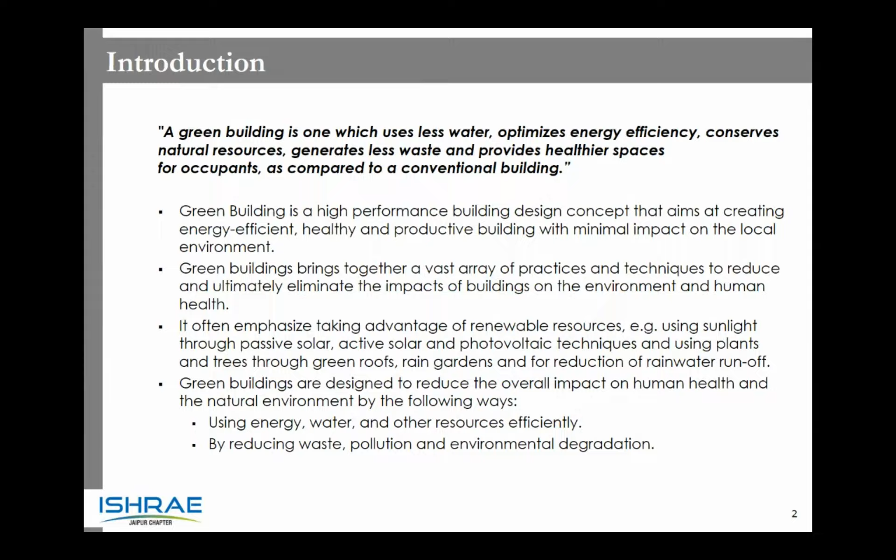Initially, when I entered this industry, the green building industry, back in 2008, the perception of a green building was that a lot of people confused whether it should be colored green, because the color can pose a natural look. I'm talking about a layman understanding. A decade ago, people thought a green building would have a lot of trees and plantation. That is entirely untrue.

The definition is a lot more than that. Green buildings back then were also believed to be more expensive and unaffordable. A lot of people used to think it is only for the luxury segment. Right now, we have so many forms of green buildings - it is very affordable and oftentimes costs less than a conventional building.

So green buildings, in definition itself, have evolved - whether it is the engineering design understanding, the architectural understanding, or the understanding of a layman. In the past, the actual intention...

The green buildings have trees all over and can be green in color - the past actual intention used to be use of less, efficient plantation that does not consume more water, collecting rainwater and making sure we utilize it, dual plumbing, things like insulation on the ceiling, insulation on the wall.

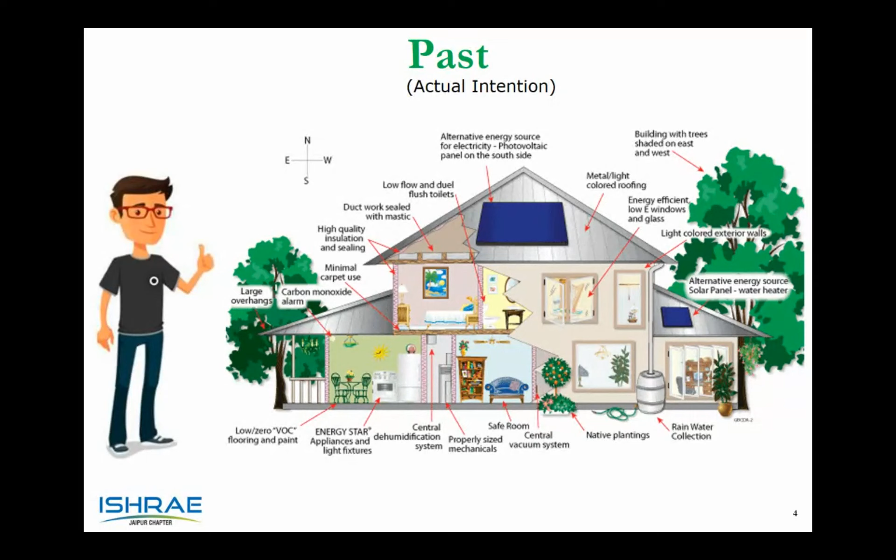And I would not disagree that this continues to be one aspect of green building design even today. However, how have we evolved, especially in today's time when we are battling the COVID-19 situation and most of us are locked inside either our homes or our offices, not having much interaction with the outdoor world?

Buildings have started proving to be a very important aspect of our life. Buildings have also grown in numbers in India, and the trend is very visible - the number of buildings that existed in 2020 are going to increase by at least thrice by the year 2030. And apart from it, since the community discusses a lot about the effects of air conditioning and sustainability relevant to the heating, refrigeration, and air conditioning world, 40% of these buildings at times, especially commercial buildings, consume electricity because of air conditioning.

The government is also coming up with a lot of cold storage plants and food storage and warehousing plans. The warehousing numbers are going up, and so the role of buildings in our day-to-day lives is going up day by day - the role that buildings have played, whether it is visual comfort, acoustic comfort, comfort in general, day-to-day well-being.

Infection transmission - each building has its own parameters through which it will continue to impact you in ways it has never impacted before, because in the past we have never spent so much time inside a building. Till date, the rough statistics show about...

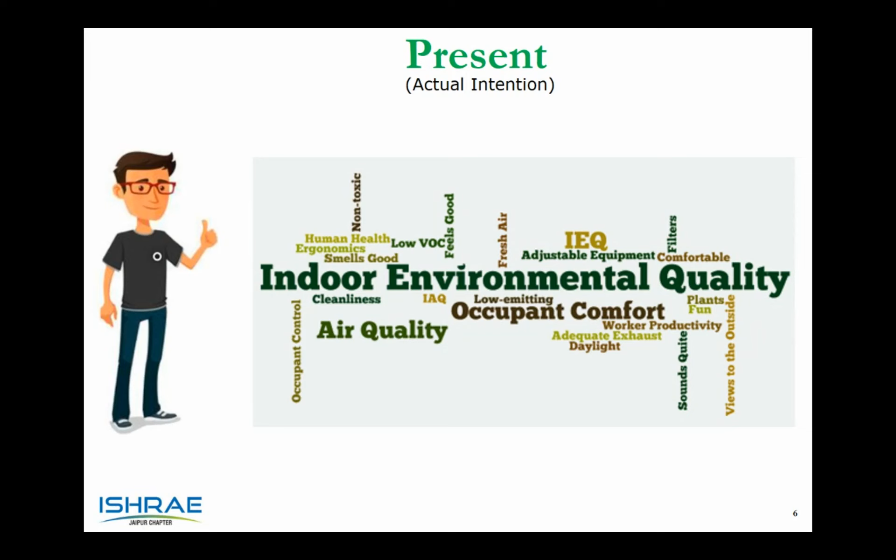We had nearly two rating systems in India. There was LEED version 2, which had partnered with IGBC in India and come to India. That was one rating system, and the other was GRIHA, which was developed indigenously by TERI. So there were two rating systems in India back then, and that is where the green building movement began.

Also, ECBC 2007 was launched, and it was far from being implemented. ECBC, just to let you know, caters to commercial buildings, and the 2007 version for commercial buildings has been made mandatory by a lot of states by now. We already have the ECBC 2017 version, which is in the process of notification in several states, including Rajasthan. In fact, Rajasthan was the first state to notify the ECBC 2007 version in the entire country.

The version 2 of LEED evolved, going to version 4. Back then, there used to be generalistic rating systems - LEED and IGBC used to call it the new building rating system and existing building rating system. Now LEED calls it building design and construction. It has a separate rating for cities, and a separate rating system for homes, which was earlier only for the US.

LEED has a process called ARC, where you can dynamically put data and assess the performance of your building. The existing buildings rating has been changed to operations and maintenance, and LEED went from version 2 to version 3, and now version 4. So the rating system has also evolved a lot, catering to all these needs that I spoke about.

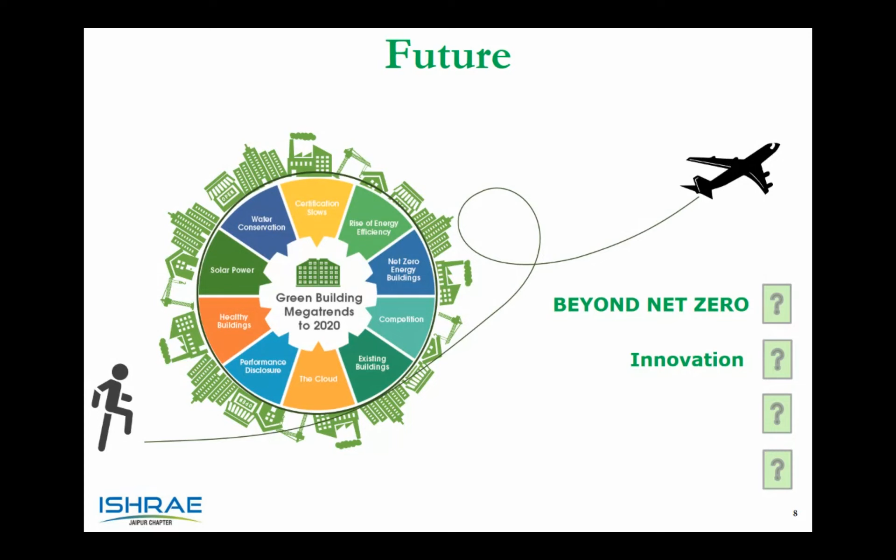Taking over green building, we always say it should have proper orientation so that we have daylight. Until now, daylight has only been focused on regularly occupied spaces that are usually occupied throughout the day. But now people are coming up with concepts where non-regularly occupied spaces should also have daylight. Pilot credits have been introduced in several rating systems regarding this, and we might see entirely daylit buildings also in the future.

There are several other concepts such as glazed north facades - passive measures which do not cost us anything, but in India, especially when we have a life cycle of over 100 years for buildings, 50 to 100 years, these small changes can have very large cumulative impacts on the global and local environments.

Rainwater harvesting is starting to become popular, especially after awareness that has been created by the government. A lot of people are now willing to do rainwater harvesting, even in small size plots. Large size plots, it's already mandatory and getting implemented.

STPs are becoming popular. There was a lot of problems a decade ago about implementation of STPs - smell issues and so on - which are getting better with technology interventions as the day passes.

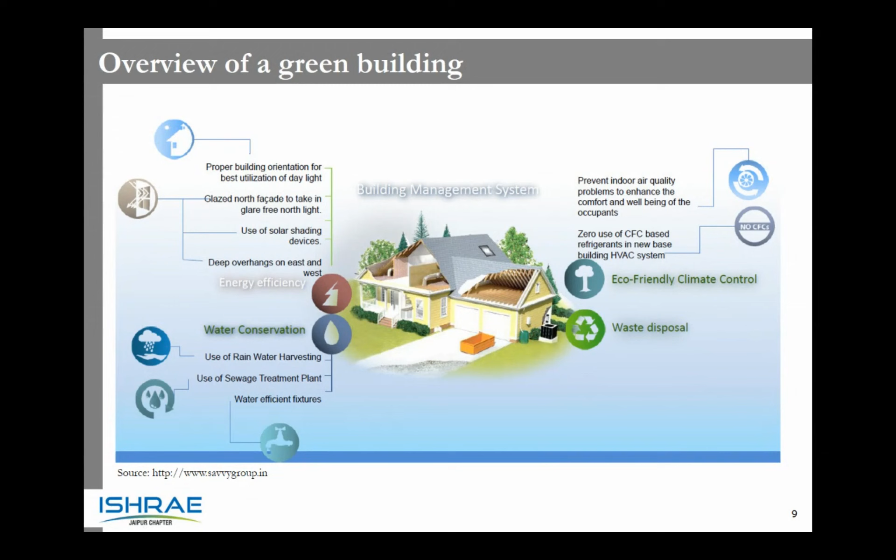Life cycle green building includes the reuse, recycle, and reduce. And one new R has been added of late, which has become very popular during the COVID times, which is called refuse.

Saying no to consumption, or trying to consume less, is also a very sustainable measure. Sourcing local construction material, efficient use of water, water efficient landscaping, savings during consumption, environmental control, water management, and disposal strategies like solid waste control and grey water handling are all part of building.

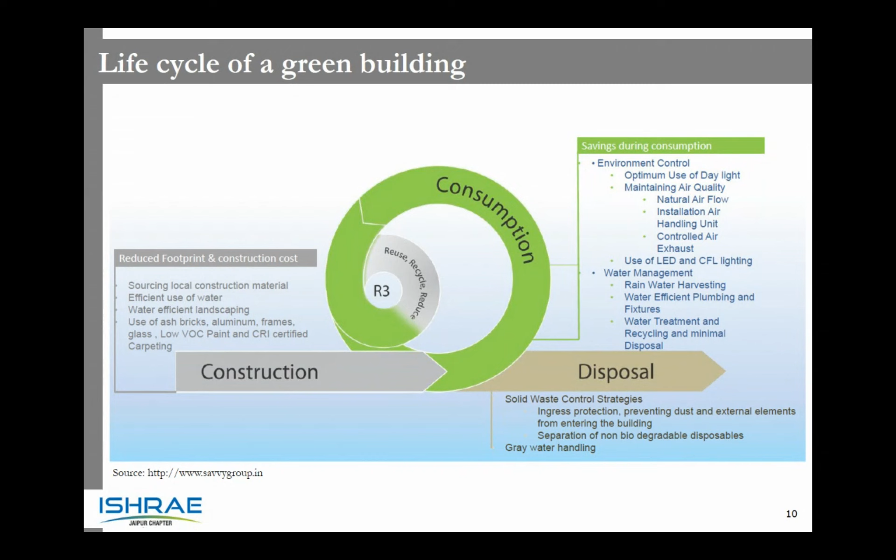The title of today's presentation is 'What Next?' Till now we've been focusing on energy, air quality, and water recycling. Looking at the future, the next 5 to 7 years, I think it will be really difficult for anybody in our generation to predict more than 5 to 10 years, because what we've seen in the last 10 years has really changed beyond what anybody would have expected.

Local food production is being given a push in the system. Can your building produce its own food? Can it use technologies like hydroponics and aquaponics to produce its own food within the building?

You must have heard about energy certificates or renewable energy certificates. There are similar concepts in the water domain, called water restoration certificates. Can you restore water bodies? Can you restore water, replenish water resources, and can that take the form of a water restoration certificate?

Analysis so far has been limited to energy simulation, daylight simulation, movement of air which is called CFD simulation, and fire simulation. Can there be analysis that examines the triple bottom line, ensuring that apart from economics, you are keeping in mind society and environment as well during building or executing a project?

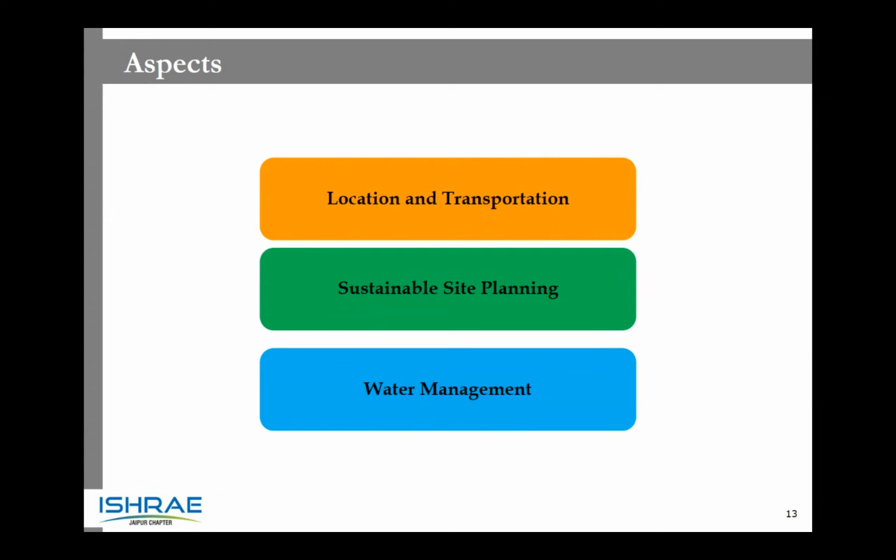Sensor-based urinals, waterless urinals, flow fixtures with aerators - aerators are now available for as little as 150 rupees on online platforms, which you can directly order and install in your faucets, doing away with expensive low flow systems. Just order an aerator online and you can be as water efficient as any other green building.

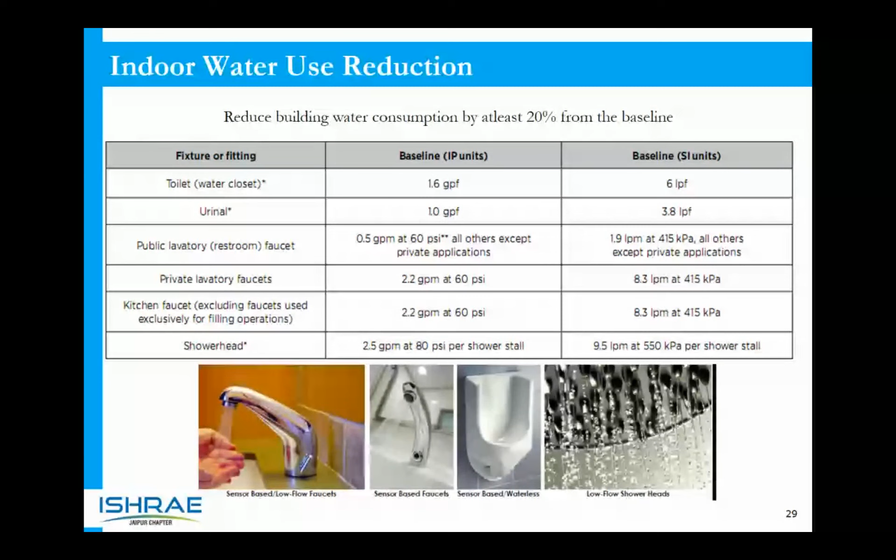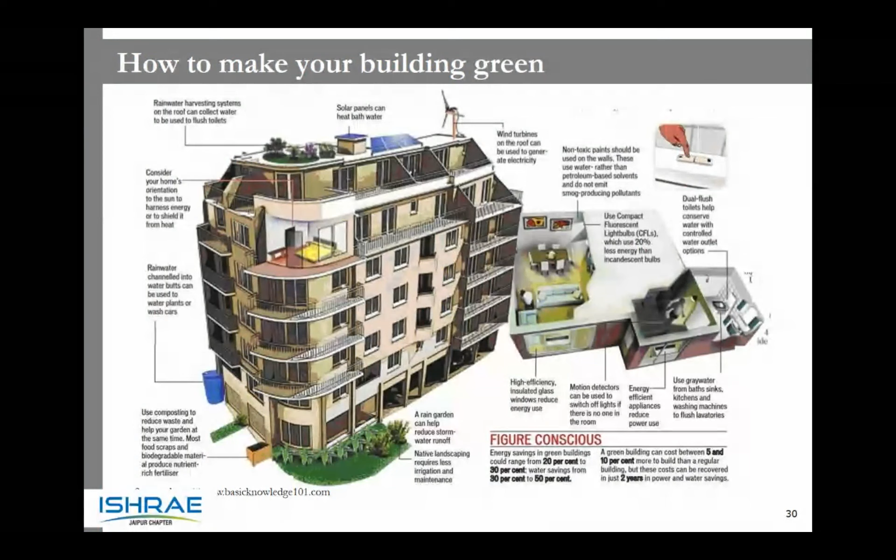This was a building in Jaipur that we did. I thought we'd take a case study - this is a green building based in Mahindra SEZ, with a building footprint of 2643 square meters and a built-up area of almost 1 lakh square feet.

This was awarded 20 points in location and transportation, where neighborhood development was not there, but sensitive land protection and surrounding density were very well addressed. Access to quality transits was there, bicycle facilities were provided, and green vehicles were not provided at that point in time, but parking footprint was definitely kept in check. Site assessment ensured that no unnecessary site disturbance was created. Open spaces were left, and rainwater was collected.

Light pollution was assured to be controlled, and in water, the entire water supply was metered. It is said that whatever you cannot measure, you cannot manage, and therefore water metering is becoming popular given its low cost. Once you are able to measure water consumption at each end use, you will be able to monitor the water level and consumption to a large extent.

Outdoor water use reduction and indoor water use reduction were also attempted, and the building was certified Gold in the V4 category of the LEED rating system.

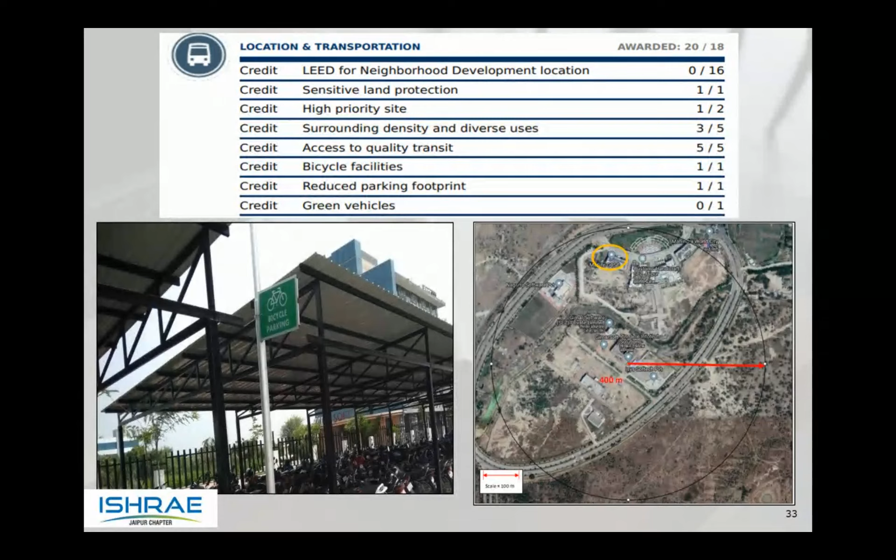So a lot of green buildings are now coming up in our cities and surroundings, and I would encourage you that as buildings evolve, as we evolve, as our needs evolve, continue to look out for opportunities to make your lives more sustainable, to make your buildings more green.

There is a program by National Housing Bank where if you go for affordable housing green rating, the entire certification fee for that rating will be reimbursed by National Housing Bank. So several other schemes by several states, extra FAR in buildings. Jaipur already has extra FAR for buildings. Several other schemes have been rolled out from time to time by different states and municipalities.

Make sure you continue to evolve with these buildings, and you continue to evolve with the technologies around you, and we add value to the future by building sustainable and being sustainable. Thank you very much.

Thank you, sir. There is some question also. Am I audible? Yes, sir, you are. There is a question from Mr. Janjay: what are the main challenges in green building construction? I think you have covered this question, but if you can answer again.

So I'll definitely answer. The main challenge, in my view, is lack of planning. Because if you decide to put something as simple as a low flow fixture after you have already ordered fixtures which are not low flow, the replacement gets very difficult. So if you can plan your building right in the very beginning, and make sure whatever you are putting in is decided early on, you are aware of the technologies, you can take as many inputs as you want. That is when you can cut down cost building a green building.